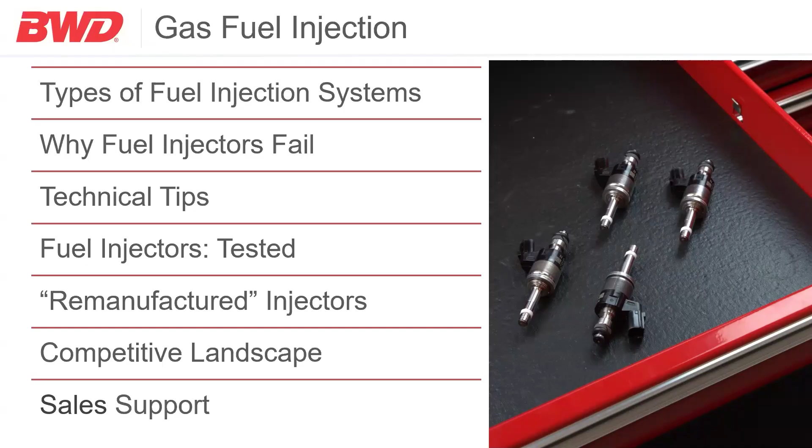And then we'll wrap up with a little bit of information around the sales support that we're putting behind this program so that we can support you, which makes it easier for you to support your customer. So that's our agenda. Now, before we start with that, let's talk about what fuel injectors affect.

Obviously, gasoline, right? We got to have gas for this thing to get a combustion event and get the car going down the road. But we got to have it done right. So when we look at what fuel injectors affect, obviously poor fuel atomization is going to reduce engine performance. We want to make sure that we have correct atomization with that fuel so that we can get the combustion event that the vehicle is expecting.

We also want to make sure we don't destroy our fuel mileage. If we have an injector with the wrong flow rate, we can absolutely cause our fuel mileage to completely disintegrate. And then we're going to be throwing a bunch of fuel into the combustion chamber, and we're just going to be losing it through the exhaust, which is a very bad thing.

We also have to look at the reliability of the engine. So we got to make sure that our injectors have the correct spray patterns, and you're going to see more about that here in just a little bit. But an incorrect spray pattern can wash away oil from the cylinder walls, which is going to damage components like the piston rings and the cylinder walls themselves. So we could see the longevity of the engine vastly decreased with the wrong spray pattern of an injector.

And then again, just like with the fuel mileage, where we don't want to dump a bunch of extra fuel into the combustion chamber, when we do that, we're going to affect emissions. So incorrect flow rates, even spray patterns, can cause unburnt fuel to be sent right through the exhaust system. And I think we all know what's behind that, which is our O2 sensors, our catalytic converter. There's a lot of components that can be damaged when we're just dumping raw fuel into the exhaust.

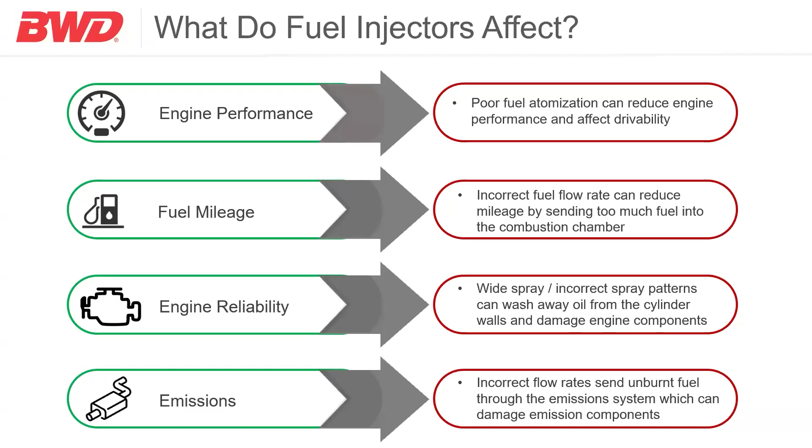So when the question comes up, what do fuel injectors affect? They affect a whole lot - really the reliability, the longevity, and the performance of the engine. So with that said, what are the types of fuel injectors we're going to talk about the most? Well, obviously it's going to be multi-port fuel injection and gasoline direct injection.

Now, with multi-port fuel injection, this is the style of injector that is still on the vast majority of vehicles that are actually on the road today. But that started changing around 2010, and you'll see a graph coming up soon where there's a pretty big gap between multi-port fuel injection and gasoline direct injection. But let's talk about how they work differently.

So with multi-port fuel injection, we're going to actually spray the fuel into the intake manifold, and it's going to mix with the air. Then when that intake valve opens, it's going to draw the air and fuel mix into the cylinder, and create the atomization needed in the combustion chamber to get that combustion event. Unlike GDI, we're going to mix this air and fuel first, open the valve, get the spark, and boom, we've got a combustion event. And that's how we're going to get our fuel and our power from a multi-port fuel injection system.

But we got to remember these are lower pressure and they're pulse width controlled. So what does that mean? Well, the port style injector is going to be, at the highest, say 50 to 60 psi, but really more like 25 to 35 psi is going to be the max pressure on these multi-port fuel injectors. But the intake manifold is going to be under vacuum.

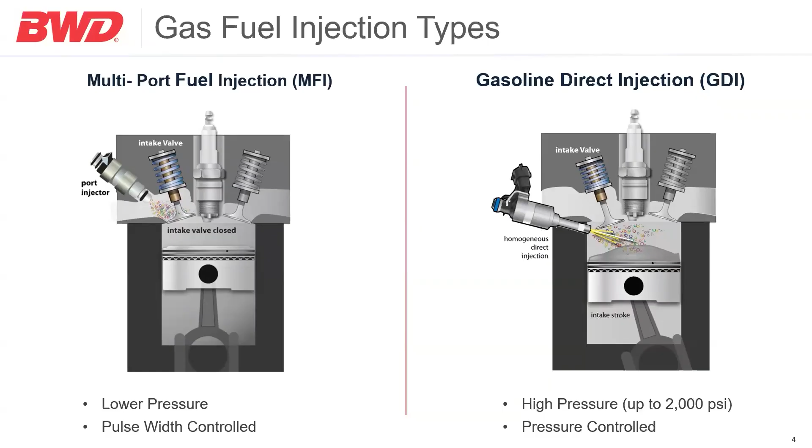Another piece to this we have to remember is that proper maintenance is key, because if we're sludging up or damaging the camshaft from poor maintenance, we're also going to be affecting the GDI pump and the process of a GDI injector being commanded properly at the same time. So again, it's very similar to a diesel, and honestly, pretty similar to an MFI system. The only difference is we're going to have a GDI pump in the middle, and we're directly injecting those fuel commands into the cylinder itself.

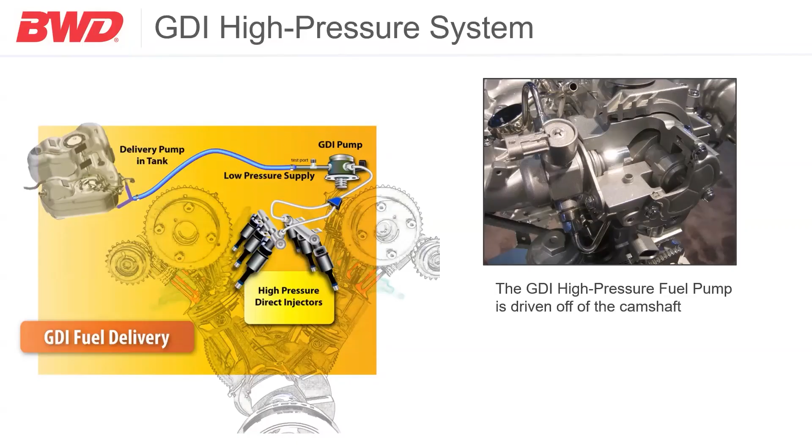Now, I said I'd show you something interesting. This is something everybody on the counter needs to know, all our parts professionals need to know, and all our sales folks need to know when they're out there talking. There are certain vehicles now, and a lot more are going to be doing this, where they've decided, let's go with both systems. Well, why is that? We'll see here in a minute.

One of the common reasons injectors fail would be carbon deposits built up, especially on GDI injectors. So in order to get better fuel economy and better power and keep those carbon deposits from building up, a lot of manufacturers are now moving towards dual fuel systems on the vehicles. So the case here, an 18 to 23 F-150 or Mustang, or a 16 to 19 Audi 3.0 - these vehicles are going to have both MFI and GDI injectors. We'll have 12 injectors total on the Audi, and 16 injectors total on the Ford.

Here's how this system works. We'll have the MFI injector doing the mixing before going into the cylinder for things like idle and low speeds and low command, and that's going to give us better fuel economy when we're not going too fast and not commanding too much power. But as soon as we stomp our foot on the gas pedal and we need to go faster, it's going to switch, moving into the GDI system where we're directly injecting into the cylinder.

So there's a lot of value to this in the sense that we can get better economy when we're not really commanding much, and we can get better performance when we need it. By using the MFI at those lower needs like idle and low speeds, as those combustion events happen, the MFI injectors will in a sense actually be cleaning the tips of the GDI injectors, hopefully keeping those carbon deposits from ever building up in the first place.

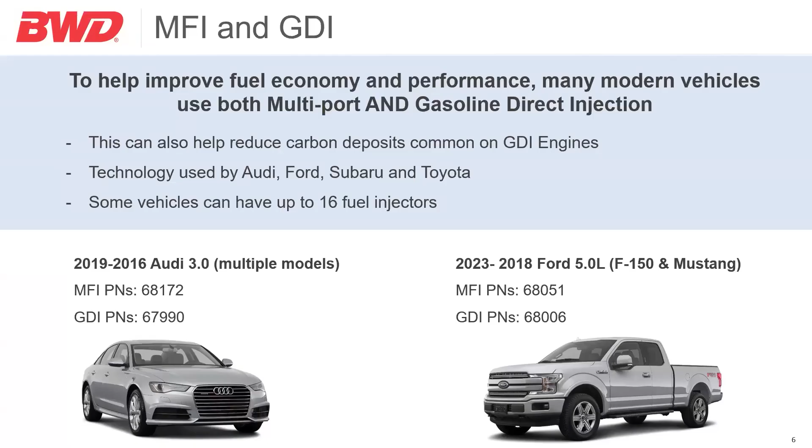One of the most important things about this slide that I want you to take away is, if you look up injectors for a vehicle and it shows both versions, it's not a mistake, and you don't have to pick between the two. You just have to know which one they need, because it could be that they need both. So if we have a diagnosis that says we need an injector on cylinder 3, we need to know which injector it is - is it an MFI or a GDI? Because we could put the wrong one in there. So remember that whenever you have a customer call, you're talking to a technician. If it pulls up with both, again, it's not a mistake - we just need to know which one it is, because it could possibly need a total of 16 or 12, depending on what happened with that fuel system.

So there's a lot of things that go bad when a fuel injector fails, but the most important here is we have to think about the fuel rail itself, or the fuel bank - that bank of cylinders - and what it's going to do to the emission system and also the cylinder walls when we have a bad injector.

So what's going to happen is we're going to command more pulse width, and we're going to command the fuel on for longer so that we can build that pressure. But the problem is now we're actually sending way too much fuel through 3 cylinders because we're not sending any through 1. And what that means is we're now going to be putting way too much fuel into those 3 cylinders. It's not all going to get burnt like it's supposed to, and it's going to go straight out the exhaust, meaning it could damage the oxygen sensor, and it most certainly will over time.

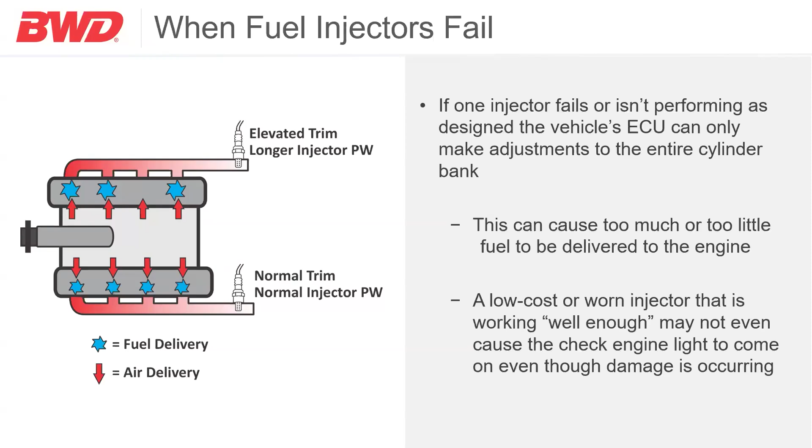We don't want an injector to fail, because we're not only going to decrease the longevity of the engine and the performance of the engine, but we could easily take out a lot of components in the process that we really don't want to see go bad. So that's what can happen when they fail. But what causes them to fail? Well, obviously electrical problems are one of them - repeated heat cycles and vibration over tens of hundreds of thousands of miles. Think about this kind of like an ignition coil - you can't fix the electrical problems.

It's all one unit. You can't tear it apart and fix a terminal or something like that. So electrical problems, when they happen, there's not much you can do about it. You have to replace the injector. Same with an ignition coil.

But contaminated fuel is a huge one too. Dirt, debris, low quality fuel, anything that clogs or partially clogs the injector nozzle is going to have a profound impact, not only on flow rate, but the spray pattern, where the actual pattern directs to. You'll see something with Aaron here in just a moment about how this fuel comes out of the injector, and you'll see it really only takes less than a grain of sand to clog one of these up.

So when that happens, we have to replace it. Cleaning it really is not an option. And in those cases, we have to remember too, if one got debris in it, the others are probably going to fail too. So it's always a good idea to try to replace those as well, or at the very least, reseal them, because when we take these injectors off as a bank, it's never a good idea to put them back on with the old seals. We want to put new seals on them.

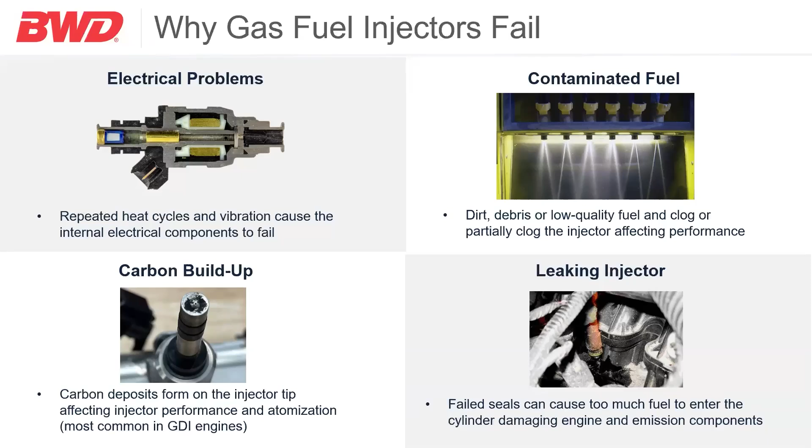Because what we don't want is to put a new injector back in, and then the other three or the other two, however many is on the bank, are leaking because a seal got pinched or a seal got rolled, or the seal was just worn out because it had 75,000 miles on it. So worst case scenario, if you're replacing just one injector, we should always be recommending a seal kit to go for the others on that bank.

And so I said I'd give you a couple tech tips, and I will before I pass it off here. But the first one is, and again, these are really good pieces of information, especially if you have a DIY customer that needs help, or you have one of those shops that has a new apprentice or a new technician that's learning the ropes. If you have one injector fail, it's always a good idea to replace the fuel injectors in matched sets. Doesn't necessarily mean you have to do all the injectors, but at least all the injectors on that bank. And, again, we know that the customers vote with their wallets.

There's nothing we can do about that, but it's always a good idea for us to recommend this, because what we don't want is two injectors or three injectors on a bank of three or four that are going to cancel out the performance improvements of that new injector. If we have one that failed, but we have two or three on that same bank that have a bad spray pattern or the flow rate's wrong, now we're only going to have one injector spraying like the original one did and how the car expects it to, and we're going to have some performance issues with that.

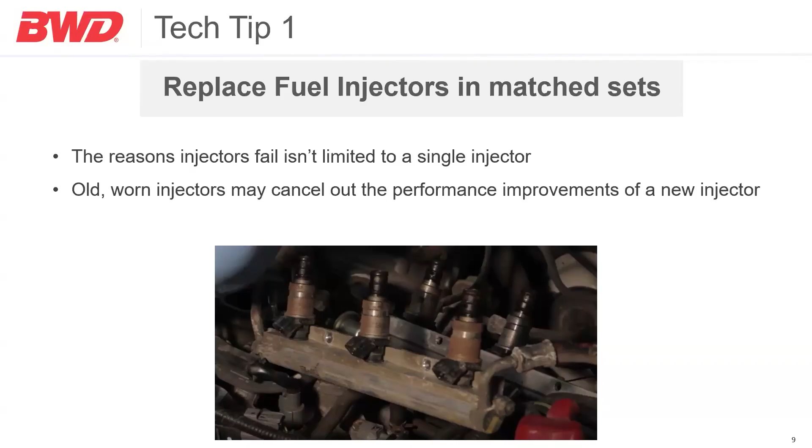So if we can get the customer to vote with their wallet the right way, always try to replace these in matched sets. Now, when it comes to GDI, we also have to remember there are a lot of one-time use components on these. So the bolts that hold the GDI pump on, one-time use. They have to be thrown away and new ones put on. Same thing with the high-pressure fuel line.

Now, it's not shown in this image here, but when you take a high-pressure fuel line off of a GDI pump and you take a new one out of the box, both will have a yellow tag that says throw away or discard when removed. It cannot be reused, and it's because the bolts and the lines are a crush fit. Once you torque them down, they actually change in the way that they size up.

When you take them off, you're not going to be able to torque those down properly again, which is going to cause a lot of issues with pressure, leaking, and lubrication for that pump. Now, it's not mandatory to replace that cam follower down there, but if we're going to put the old high pressure fuel pump back on, we know it's good, no problem.

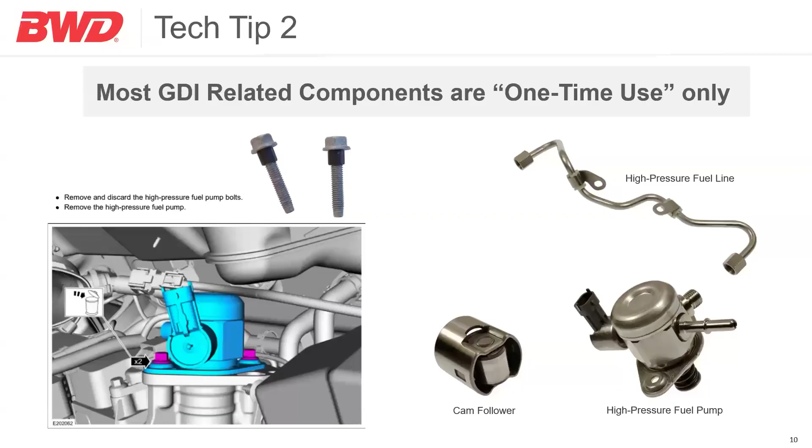We're going to replace those fuel lines. We're going to replace those bolts. There's nothing wrong with changing the cam follower and putting a new one on, simply because this helps build that pressure. That cam follower goes on the camshaft lobe and impacts that spring. If there's any wear on the cam follower, it's always a good idea to inspect it and see if maybe we should replace that as well. But for sure, we need to do the bolts and the lines.

Remember, this is especially true with GDI injectors: if we have a vehicle overheat, we have to replace the head gasket, maybe have the cylinder head resurfaced or something like that. When that happens, you're going to see the injectors fail. You're going to have damage to the injectors. You're going to have a lot of carbon deposits, and you're probably going to have issues with the seals on them. So in these cases, it's always a good idea to do new fuel injectors on that entire cylinder, since it's already torn apart. We don't want to put it back together and have the spray pattern or flow rate of that GDI injector be wrong and cause more damage than what you already had with the head gasket failing or cracking the head.

Remember, it's really no additional labor. The engine's already apart, it's just the cost of the injectors themselves. Again, we know customers vote with their wallet, but this is a good conversation piece to have with an apprentice, a new tech, or somebody on the counter.

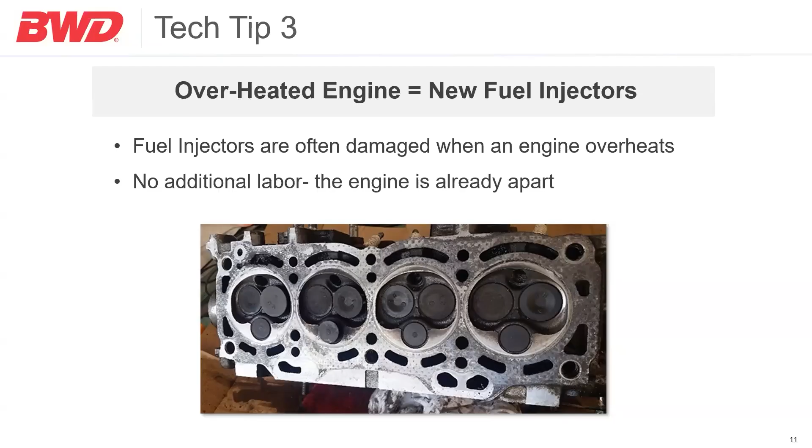Awesome, thank you very much, Corey. A few weeks ago, I had the chance to travel down to one of our facilities in Greenville, South Carolina, where we manufacture, test, and develop fuel injectors. The purpose was really to follow the engineering team through as they did some performance testing on multiple fuel injectors across a few different brands.

One of the things we tested for was spray pattern—this is the angle at which the injector sprays fuel down into the cylinder. It does change based on application, but it's very important that it's correct and matches OE. This particular application, OE calls for a spray pattern of 20 degrees. When we tested the OE injector, that's exactly what we saw. When we tested the BWD injector, that's exactly what we saw as well. So the performance matched OE exactly.

Where it got a little bit dicey was when we tested a few of the low-cost competitors. What we saw from one of them is that it was too narrow. Now, this isn't dangerous—it will still work. But what happens is it doesn't allow the fuel to atomize as efficiently as it could. That generally results in a little less vehicle performance, and could potentially affect fuel economy if the ECU decides it needs to send a little more fuel into that cylinder to get the combustion it's looking for. But it would work, and it wouldn't trigger the check engine light.

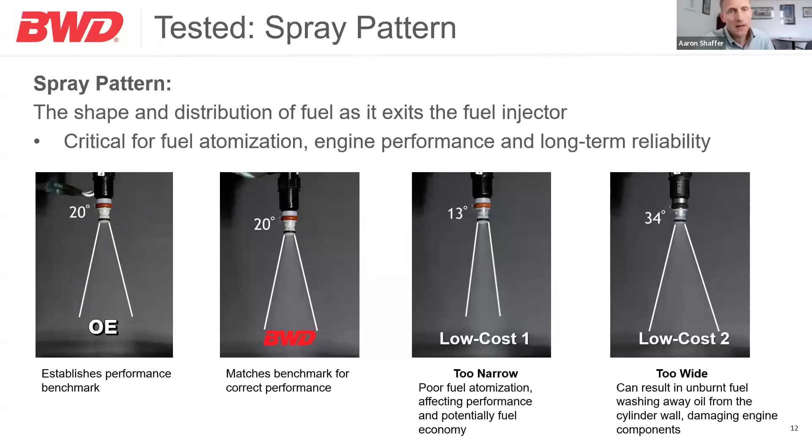The other thing we tested for was flow rate. This is how much fuel the injector is going to meter over a very specific period of time. This test was all done over 90 seconds.

Again, first was OE to establish the benchmark, and that it filled up the vials to the levels we thought it was supposed to. And the thing that is really good to see across both OE and BWD is how consistent all three injectors were.

That's the sign of good engineering, good testing, good calibration. On the first low cost unit, there was two issues. Probably the most worrisome was that they're just inconsistent. One of them was fueling much more than the other ones. The other problem was overall, these were overfueling. These are going to dump more fuel into the cylinder than what the ECU is going to expect. It is possible the ECU can adjust for this to a degree, but what could really be problematic is that middle injector that is going to continue dumping much more fuel than the vehicle would like.

And then what we saw from the other low cost unit was underfueling. I suppose the good news here is that they were consistent, but obviously there's a problem here with the metering or the calibration because they just didn't flow as much fuel as we would have expected to see. Again, the ECU can adjust a little bit, but if the injector can only flow so much fuel, then you certainly risk some long-term damage of running an engine too lean for a long period of time.

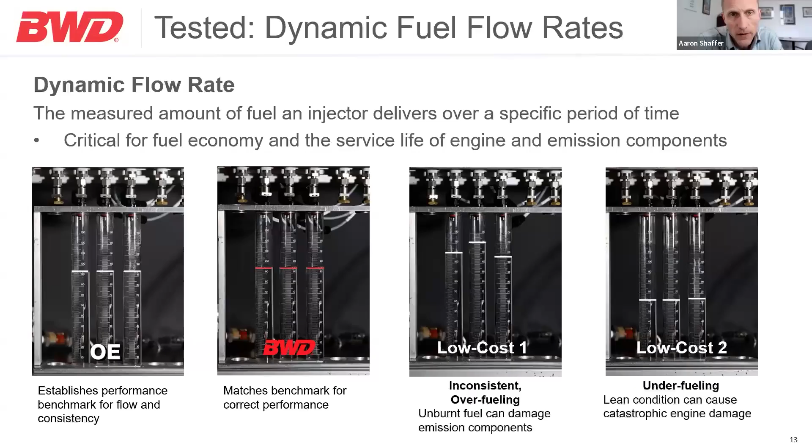The real key to an injector, as far as how consistent they are, how well they're going to perform, it's all about the metering disc. This is the little piece that's welded on to the end of it that has the holes or the orifices in it for the fuel.

We're fortunate in being a fully vertically integrated supplier where we design and manufacture our own metering discs. These absolutely have to be, everything about them must be correct and match OE performance. All of ours are application specific. We don't use batch discs the way some low cost competitors may.

I think the other thing that's critical is how we use lasers to drill these holes, but then we also make sure they're indexed correctly because that matters. You could have the right metering disc, but if it's not indexed correctly on the injector, the spray pattern isn't going to be exactly what it needs to. You can see some of the designs in there, how they're not entirely symmetrical. So on all of them, this is one very important aspect of an injector.

It's difficult to see with the naked eye, but if you take a magnifying glass, you can certainly look at that. If ever anything doesn't look exactly like OE, it's going to be problematic. And sometimes the size of the holes, it's difficult to tell with the naked eye. But of course, these patterns and the holes, the angles, these things should always match OE exactly.

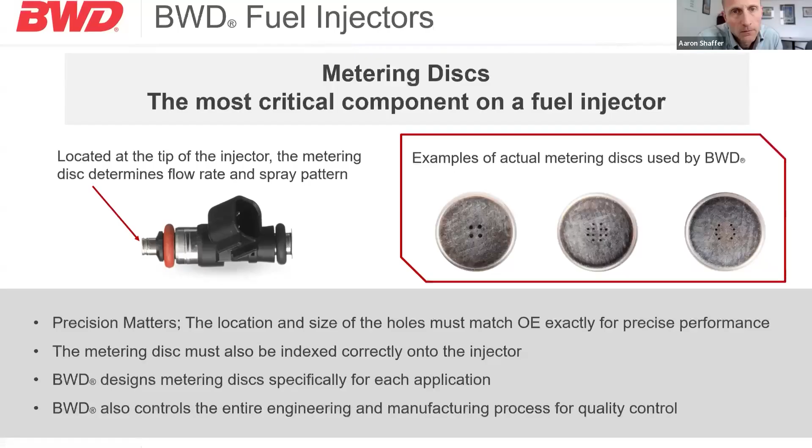That one thing we'll briefly touch on is kind of this idea or this myth of a remanufactured injector, and it becomes harder to actually understand or believe how folks are able to remanufacture an injector when you really know how a gas fuel injector is made. One thing I want to say is it's very possible to remanufacture a diesel injector. They're entirely metal components. They can be disassembled, cleaned, and new components can easily be installed, and they can be remanufactured. Gas fuel injectors, especially GDI injectors, this is a different deal.

When we're making them, the first thing we do is put the inlet tube together, and this is multiple components that are welded together to make that internal tube. Then the electronic components are added to it. The coil windings are wrapped around it. And then the entire piece is sealed inside of a plastic overmold. The manufacturing process of these isn't that different than the way we make an ignition coil.

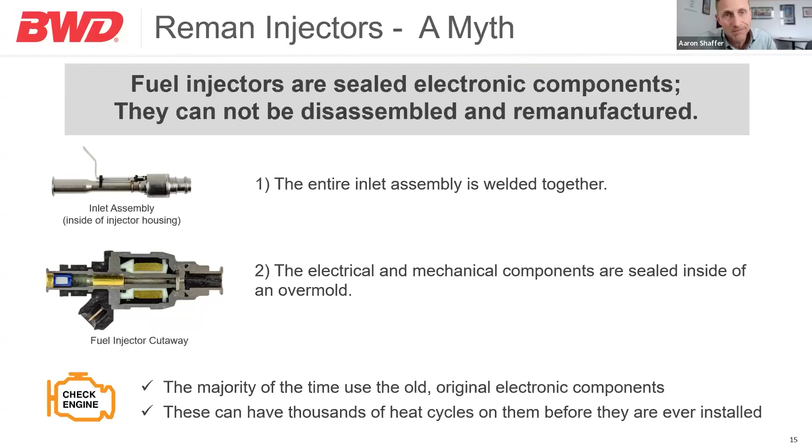And because all of these components are actually sealed into that plastic housing, they can't be taken apart or disassembled. It's a complete modular design. So what's out there, I mean, the majority of these remanufactured injectors that are out there are just old injectors that have been cleaned and have new seals on them. They'll have old original electronic components on it, with thousands and thousands of heat cycles on them.

So what you really get, and what you're able to go to the market with BWD, is a brand that's backed by 15 R&D centers around the world, 21 in-house manufacturing facilities, including Greenville, detailed testing and performance analysis of new applications, as well as end-of-line testing, on-vehicle testing, where we actually test new injectors, new GDI fuel pumps at our vehicle testing center in Texas.

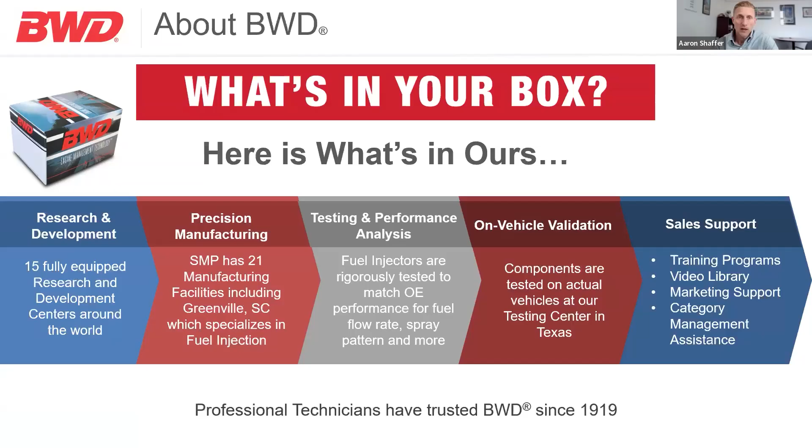We understand there are other choices of fuel injectors out there, but the case for an injector like BWD becomes easier when you compare this head to head with some of the alternatives. On the low cost Asian source stuff, yes, it is less expensive, but these folks have very limited quality control and testing, which leads to inconsistent performance across the injectors.

On the reman side, as we discussed, these are largely old units that have just been cleaned, flushed, and have new seals. They generally work okay initially. Spray patterns and flow rates usually test pretty well because they're cleaned OE injectors, but it's impossible to know how long they're going to last on a customer's vehicle.

Compare that to a program like ours, which is entirely new, not reman. The components have all been tested and validated. I think what really sets us apart from these folks, and even from some of the OE folks, is being able to go to market with a complete program, wide coverage, a lot of injectors, but also the related components often needed for a complete fuel injection service. Aris will talk more about that.

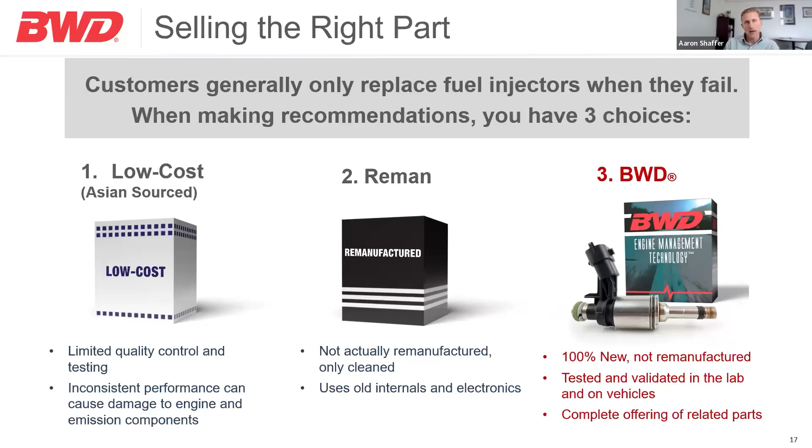All right, thank you Aaron, and Corey, for those tech tips and explanation of the gas fuel injection system. Now let's talk about what BWD offers.

This slide is a quick reference menu to one of the most complete fuel injection programs in the industry. This program will help you capture more sales and ensure complete and confident repairs. We start with our 100% new injectors covering all major types like TBI injectors, over 750 SKUs in MFI injectors, and the new technology leader GDI injectors. Each one is engineered to meet OE performance and backed by our in-house manufacturing and testing expertise.

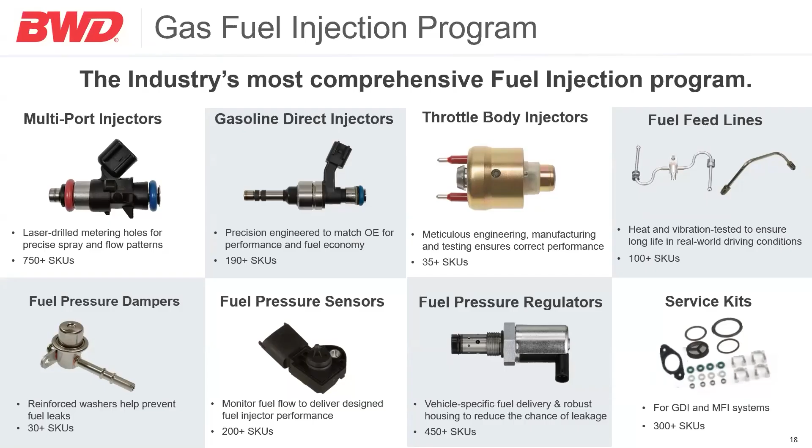We also offer the related components, from fuel feed lines and fuel pressure sensors to dampers, regulators, and service kits. These parts aren't optional, they are essential. If you're not offering them, you're risking an incomplete job and leaving money on the table. That's where BWD comes in. We've done the hard work of assembling this program so you don't have to. With industry-leading coverage, OE matching quality, and a full range of support parts, we're proud to be your one-stop shop for gas fuel injection. When it comes to delivering a complete solution, BWD leads and the rest follows.

This chart shows just how much injector technology has evolved and how far we've come in our industry. In the 1980s, TBI injectors dominated. By the mid-90s, MFI injection became the most popular. And today, we're seeing a major shift toward GDI and dual injection systems, like Corey said earlier. BWD has stayed ahead of the curve throughout it all.

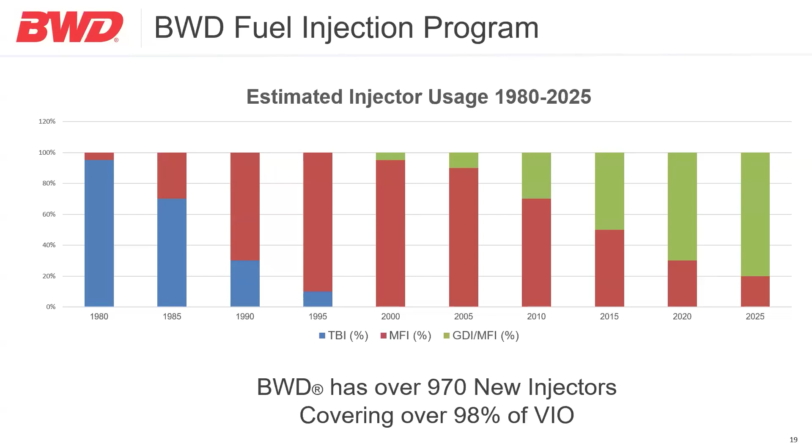We now offer over 970 new injectors, covering more than 98% of the US VIO. That's over 272 million vehicles, meaning 272 million opportunities. So no matter what era of fuel injection your customer is working, whether it's TBI, MFI, or GDI, you can count on BWD to deliver the parts, coverage, and quality to get the job done. One program, all technologies, complete confidence.

As you can see on this slide, it clearly shows where BWD stands in the market. Obviously it's on top, with both new MFI and GDI injectors having total coverage. On the left you see our new MFI injector competitor landscape, with 762 SKUs, including brand new MFI multi-pack injectors. BWD outpaces every other supplier, including remanufactured programs. That means better coverage, more first call opportunities, and fewer lost sales and returns.

On the GDI side it's the same story. We have 193 new injectors, and we are continuing to expand as this is a growing technology. Unlike many others who rely on reman options, we offer new OE matching injectors that installers can trust out of the box. When your customers need fuel injection, whether it's legacy MFI or the latest GDI, BWD gives you the best coverage, the highest quality, and the confidence to deliver the complete solution.

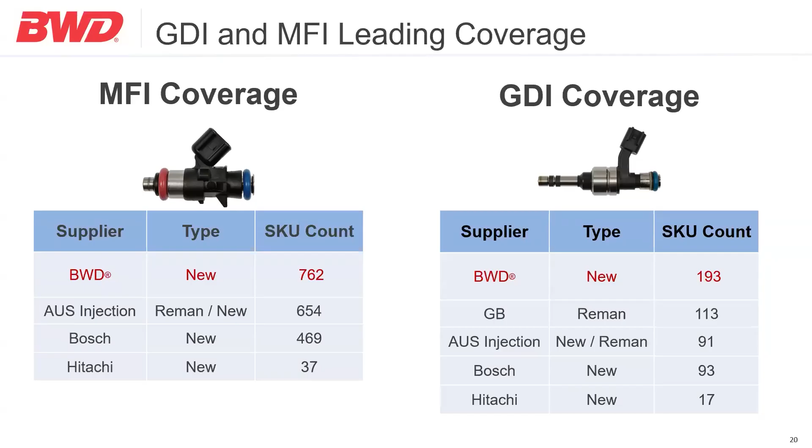A great upsell opportunity is our MFI multi-packs. These should always be offered when a customer is looking for one injector, like Corey mentioned. When selling or installing only one injector, it's a great opportunity to offer the set. Imagine all of the injectors are the same age and have the same number of miles, right? Or maybe not. Do you think the other injectors will last as long as the new one, or will the older worn injectors work as well as a new single injector that's being installed? When a customer walks in or calls for only one injector, there's a good chance the other injectors are worn out too.

Offering a full set not only improves vehicle performance but also reduces labor time and comebacks. With 22 kits available covering over 36 million vehicles, these packs are ideal for popular platforms like GM trucks and SUVs with high volume and high demands. Plus, fewer boxes to stock, fewer part numbers to look up. It's a clear solution for yourself and your customers. Multi-packs make the sale easier, repair cleaner, and your customers happier. And that's a win across the board.

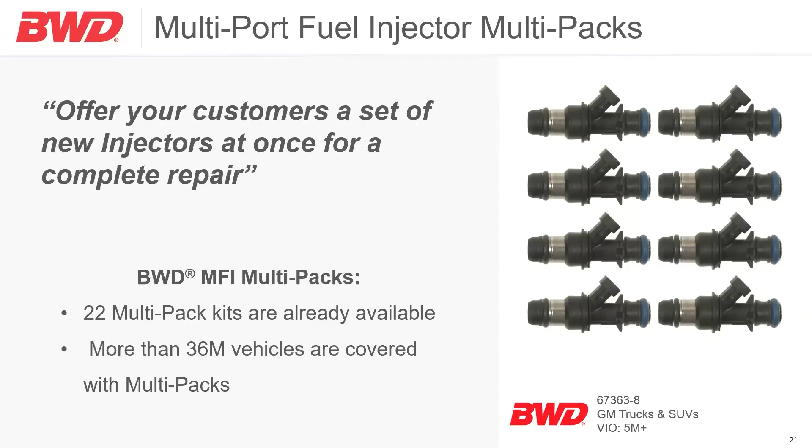Not only do we have industry-leading injector coverage today, but we are also committed to offering the most comprehensive aftermarket program for years to come. What you see here are examples of MFI injectors that are gaining momentum. We want to share this real-time market intel so you can be better prepared for the next wave of demand.

This category, especially among domestic applications like Chrysler, Dodge, Jeep, Ram, and Ford, is seeing increased replacement activity. High VIO parts like FJ1431 with 3.5 million VIO, and FJ1520 with over 800,000 VIO coverage, represent growing sales opportunities. We recommend reviewing inventory now and planning proactively, because these part numbers are positioned to become top sellers, and we want you to be ready before the demand spikes. With BWD, you're not just stocking for today, you're ready for tomorrow.

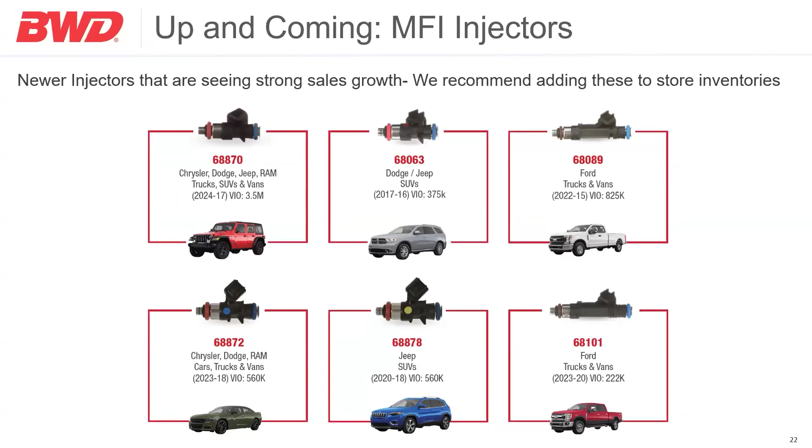As GDI systems age and vehicles hit high mileage, injector failures are becoming more common, so this is a category you want to watch closely. With BWD, you're not reacting, you are staying ready. Be first to market, first to shelf, and first call when they need it.

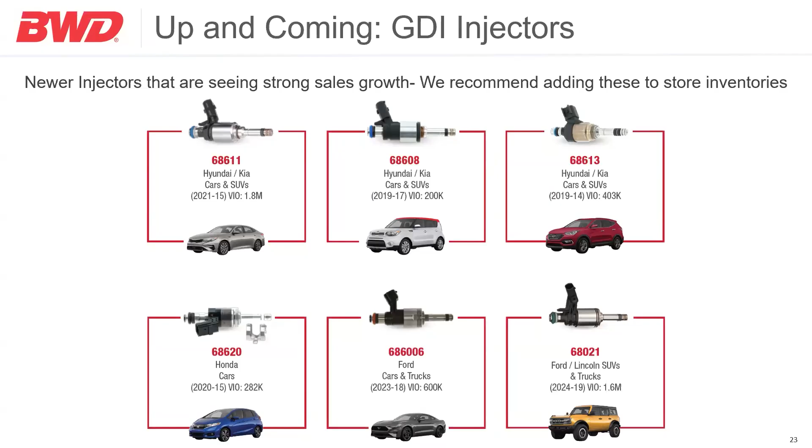Gasoline direct injection systems are complex, and the repair goes beyond just replacing an injector. That's exactly why BWD offers a complete solution for the GDI system. From high-pressure fuel pumps and fuel feed lines to camshaft followers, seals, sensors, and even complete service kits, we give you the coverage to tackle the entire job.

Our commitment to provide industry-leading aftermarket support doesn't stop at injectors. We back it up with a full range of related components from fuel pumps, fuel feed lines, sensors, gaskets, and more, because that's what it means to be a true one-stop shop. When you stock the full GDI program, you're not just selling parts, you're solving real problems for your customers. And that's exactly what makes BWD the choice for complete GDI service.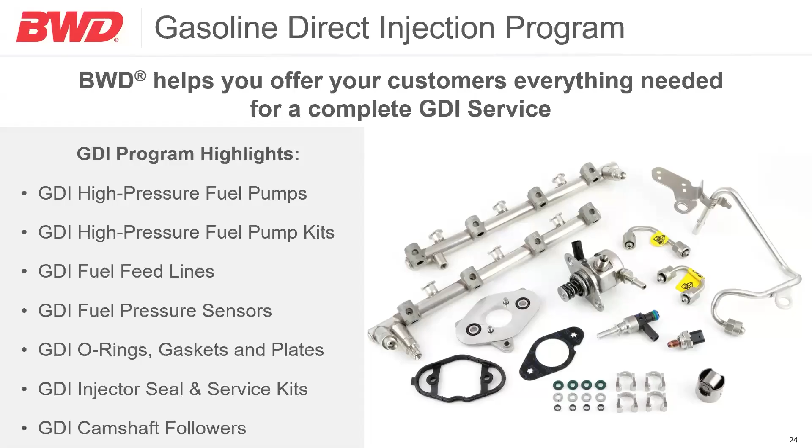And I think Corey mentioned this earlier, but did you know that high pressure lines with yellow tags should never be reused? These are designed for single use only. Reinstalling them can lead to leaks, performance issues, and potential safety risk.

So we all know how popular GDI systems are in today's vehicles, and that demand is only growing. If you want to be in the GDI business, these are the parts you need to stock.

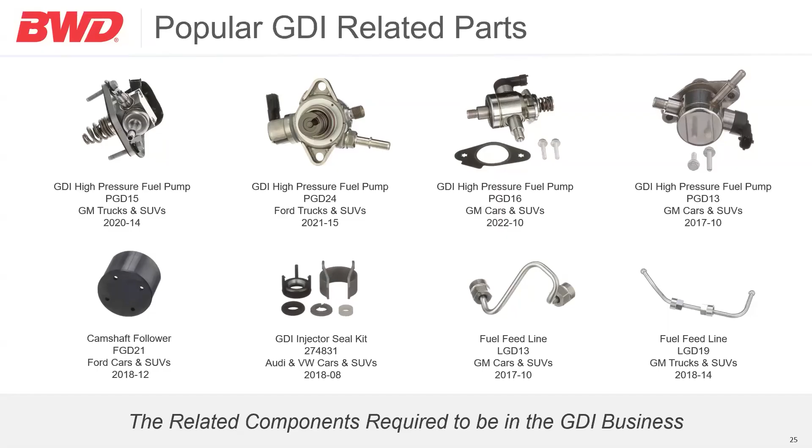At BWD, our goal goes beyond offering top quality components and strong VIO coverage. We are here to improve the repair experience by offering a complete solution from the first part to the last bolt. When you stock these parts, you're not just meeting demand, you're positioning yourself as a true GDI-ready partner and helping your customers get the job done right the first time.

So this is one of the most exciting additions to our fuel injection program, which is the first GDI high pressure fuel pump kits available in the aftermarket.

This actually reminds me of one time when I used to have a Honda Pilot, and this specific model demanded a specific fuel. I went to a gas station that I guess added water or something else in the fuel, and as soon as I took off, the engine light came on in my dashboard. So I had to go right away to the dealer. When I got there, the fuel that I added in the tank damaged the whole fuel system.

So I had to actually replace the fuel feed lines, injectors, and the fuel pump, and the gaskets, and all the parts, which cost me a lot of money. But thank God that now us, BWD, we are the first aftermarket to have complete kits to solve problems like the one that I had. These kits include both fuel pumps and GDI followers and all the parts that are needed depending on the application.

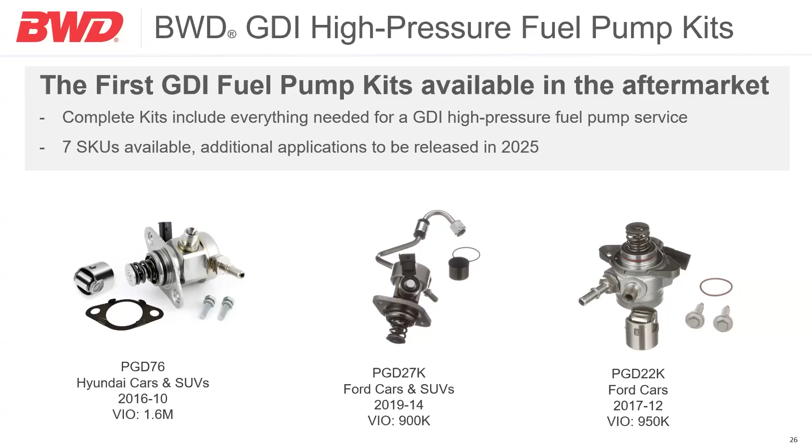This is a perfect example of how we are helping shops save time, reduce comebacks, and get the job done right.

And to wrap it up, let's talk about what truly sets BWD apart: our commitment to quality, backed up with rigorous testing. At this point in the sale, your recommendation matters the most. Customers trust what you trust. And this slide is about giving you the most confidence.

All BWD MPFI and GDI injectors are 100% new and tested. Every part undergoes initial life cycle validation and end-of-line testing before reaching the shelf. In fact, our process includes more than 35 different tests and inspections covering everything from endurance and spray patterns, like Aaron mentioned, to thermal cycles, vibration, and flow calibration.

But we don't stop in the lab. Like Aaron also mentioned earlier, and you've probably seen Corey in some videos on our YouTube channel, we also run on-vehicle testing at our Texas Testing Center to validate performance in real-world conditions. Whether you recommend ignition components or fuel delivery parts, you can be sure that every BWD product is engineered and tested to meet OE performance.

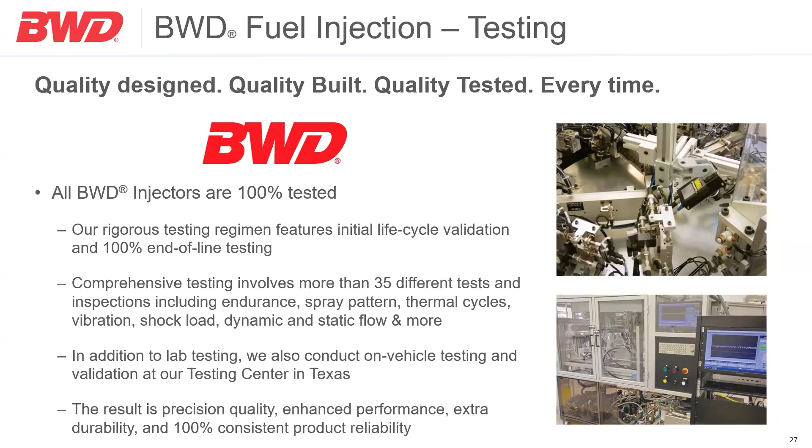We made this investment to build trust with you and your customer. So when you see BWD on the box, you can rest assured it is quality designed, quality built, and quality tested every time. Now let's go back to Aaron so he can talk more about our sales support.

Awesome, yeah, thank you very much. So I know we've covered a lot today, and one of the things we want to spend a little bit of time on are the materials available to you to help take this message to the street, and arm you to talk to service provider customers as well as retail customers on the front line.

We have multiple printed materials available to you, including several What's In Your Box flyers, one-page flyers, as well as a very detailed 6-page program brochure on gasoline fuel injection. We also have a pretty robust YouTube channel we've built out over the years. The BWD channel has right around 15,000 subscribers, and we have a fuel injection specific playlist with 12 videos on it, plus additional vehicle-specific playlists covering multiple systems, diagnostic, and installation videos.

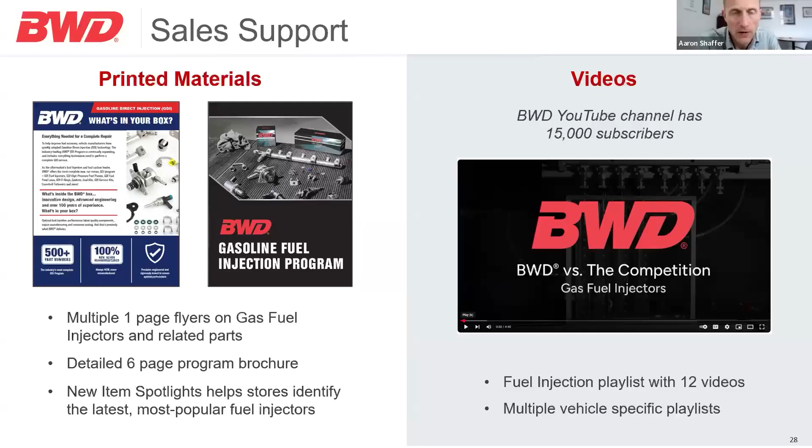Just to tie this up, we want you folks to know that our gas fuel injectors are never reman, 100% new, never remanufactured. We manufacture our own in America, in Greenville, South Carolina. They're tested and calibrated for optimum engine performance and fuel economy, tested in the lab.

I think the thing that really sets this program apart, even from other folks doing a good job making good fuel injectors, is the wide coverage we have and all the related components. We also have sales support and training materials available to really help you take this to the street. So thank you very much.